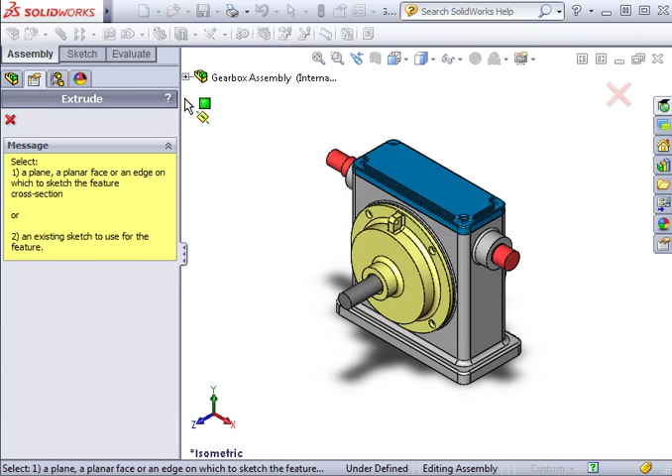I'll begin by creating an assembly cut. I'll select the extruded cut icon from the assembly toolbar and sketch a large rectangle. I'll exit the sketch and set the end condition to through all.

Now I only want the housing affected by the cut, so I'll edit the feature scope of the cut and exclude all components except the housing.

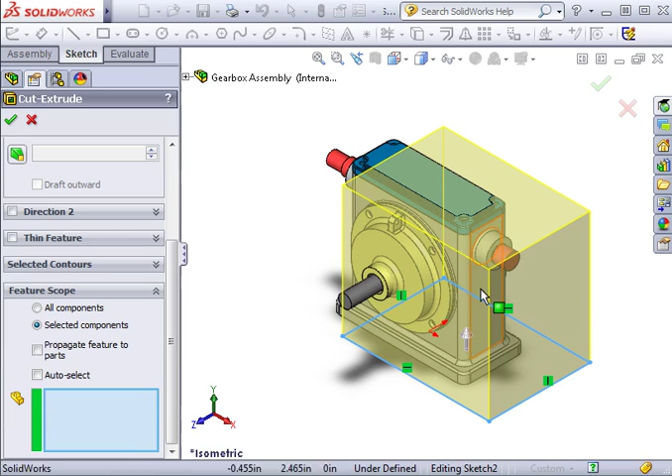And click OK. To further reveal the internal components, I'll hide the front cover plate next. I'll right-click on it and select Hide.

The last thing I'll do is move the cover plate. If I expand it in the Feature Manager tree, you can see there are 3 mates in the Mates folder.

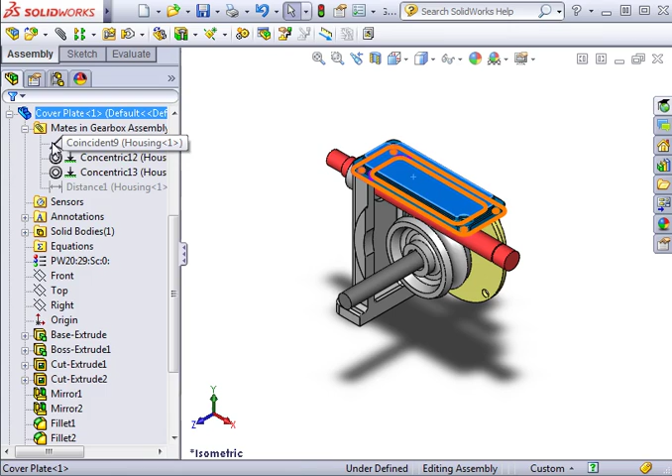I'll suppress the coincident mate that is keeping the cover attached to the housing. I'll replace this mate with a distance mate that moves the cover plate up.

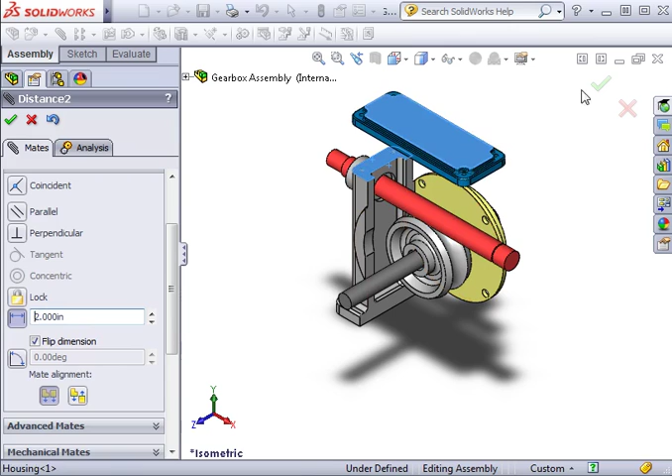Now at this point, I've made 3 major changes to this configuration. I've added an assembly cut, I've hidden a component, and I've added a new mate.

Now let's go back to the Configuration Manager and activate the original default configuration. To activate a configuration, you can either double-click on it or right-click on it and select Show Configuration.

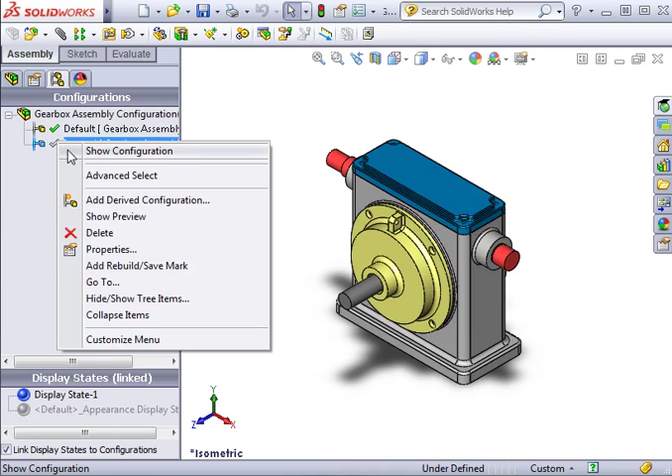As I toggle back and forth between the two, you can see how the changes I made only affect the new internal configuration. You can add as many configurations and derived configurations as you wish.

If you want to know more about the different items that can be controlled using assembly configurations, type Configurations in the SOLIDWORKS Online Help Index. A subcategory called Configurable Items for Assemblies will appear, which lists every item that can be controlled.

Now, if you're wondering why the changes I made to the new configuration in this example, such as adding a cut and a new mate, didn't affect the default configuration, your question will be answered in the next lesson.